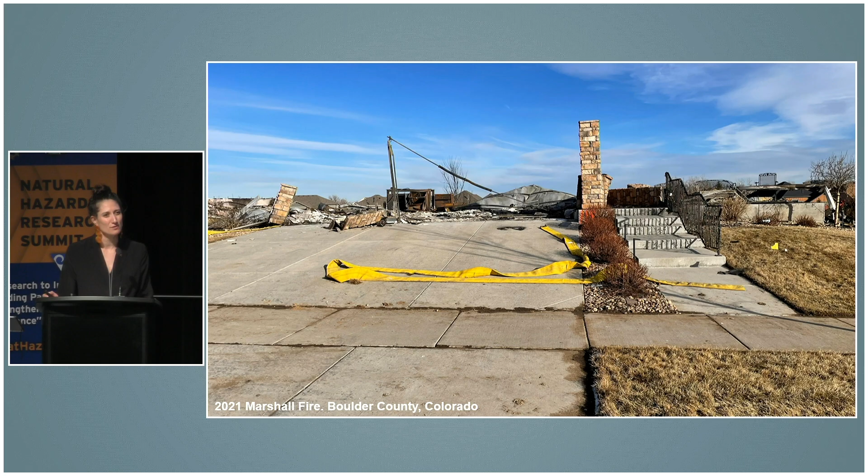The fire exclusion policies enacted throughout the 20th century, coupled with climate change, make it impossible for this hazard to only be mitigated within the wildland. We must be mitigating within our communities. Wildland response as well as urban response are becoming overloaded, leaving us with devastated communities. When fire is propagating through the wildland, our vegetation is the fuel. However, when fire is propagating through our communities, it is our single-family homes that are the fuel for the fire, which is why we have to think about the design and mitigation of these single-family homes.

And so what do we do for communities that look like this? Well, first off, we have to acknowledge that fire is a natural occurrence within our landscape. Our flora and our fauna actually benefit from fire within our landscape. And so we cannot continue the fire exclusion policies that were enacted during the 20th century. Also, as a NHERI community, we know that our critical infrastructure components need to be protected. And so what is the connection between the fire and these critical infrastructure components? And this is where our homes come in.

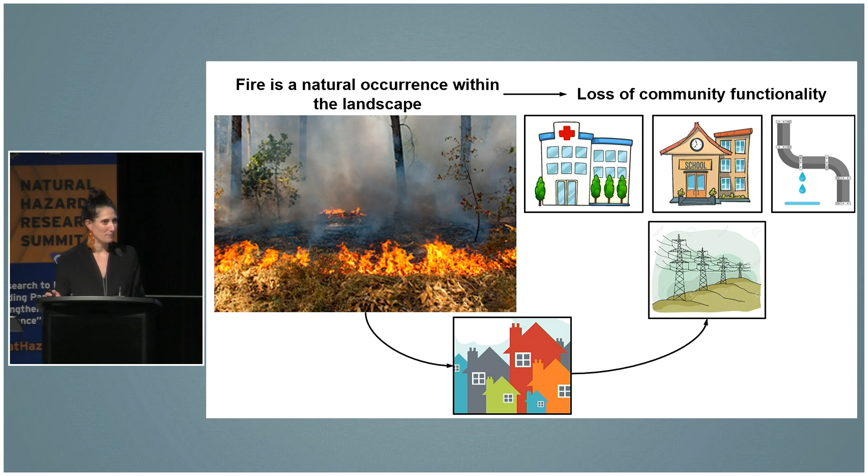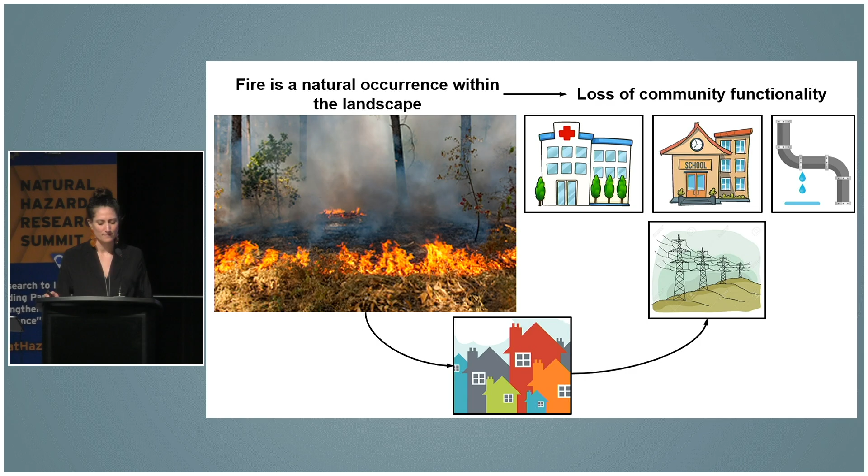So our homes are the assets within our communities that need to be protected, as David pointed out in a previous talk, but also it is the fuel within our communities that need to be protected against so that we are not overloading our fire response. And so if you think about what the mitigation practices are today, a lot of it is centered around defensible space. And what does that actually mean? Well, defensible space means that we are clearing our land of ignitable material around our house so that our house can be defended. Just as in other hazards, our mitigation practices are focused around life safety, not asset protection. So for our fire response to be able to defend our homes, we need to reduce the intensity of our fire within our community, and that is going to occur by reducing the amount of ignitable material around our homes.

In addition, the most common fire spread mechanism within communities are embers. Embers can fly up to 2.4 kilometers and even further in these wind-driven events that we're seeing, such as the one in Lahaina, such as in Paradise, California, such as in Oregon in 2020, Colorado in 2021, and in Santa Rosa in 2017. This means that every home within 2.4 kilometers of an individual home can threaten that home for igniting. We understand the concepts of community resilience in this room. We have done tons of research that community resilience cannot be achieved on a house-by-house basis, property-by-property basis. We need to look at community-wide, and this hazard is no different.

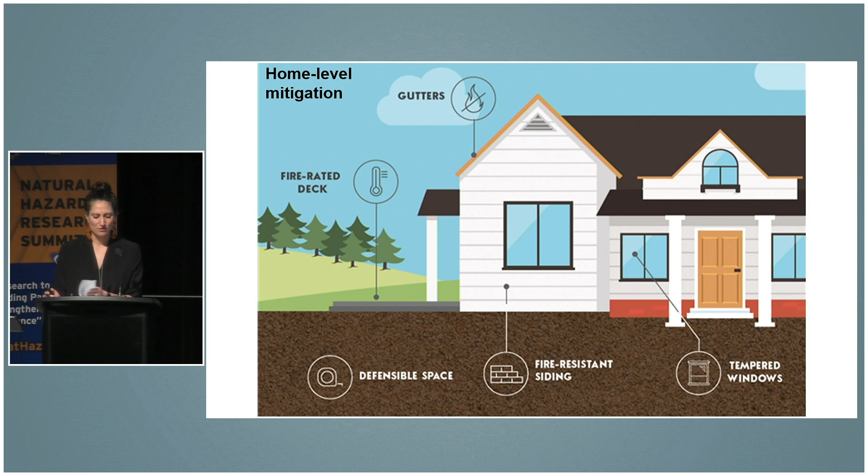And so we can mitigate on different levels. We can mitigate on the parcel level, and this is removing the ignitable material around the house, reducing the intensity of the fire as it encroaches the house. We can actually mitigate on the home itself. Home hardening will reduce the likelihood of ember intrusion within the house so that the home is not igniting from the inside out. But there are also community-level mitigation measures.

How close are our homes to open spaces that are burning? Or what are the pathways for fire intrusion into our communities from those open spaces? What is our home-to-home spacing? In some communities, our homes are spaced so closely together that they are in each other's defensible spaces. What do we do? How do we mitigate within those types of communities?

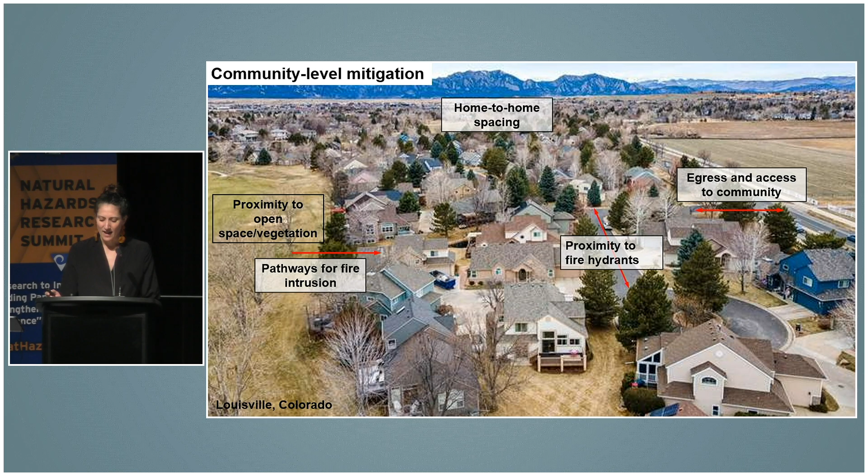What is the egress and access to our communities for firefighting? And what is the proximity to fire hydrants so that our homes can actually be defendable? So this community is really primed to start research on this topic, and I hope that you all will attend the session tomorrow where we're going to talk about how to enter into this field of wildfire research, how there are many researchers within this room performing research in this space, and they didn't all start here.

How can we use our knowledge from other hazards and apply it to this hazard? How can we talk about building transdisciplinary teams, as many researchers have talked about today, to really solve this problem? And what do we need experimentally, numerically, and from field data collection to be able to systematically collect data on our homes and what is causing home destruction in these communities?

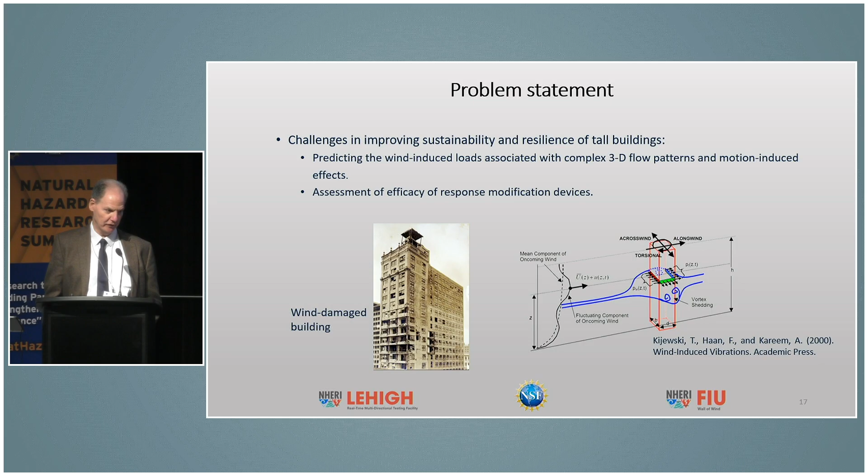And as we know, we've been talking about resiliency, and it's rather challenging. I'm just focused on tall buildings when we look at the complexities of the wind motion and the way that the structure deforms, and more so if you have to evaluate response modification devices to make the system more resilient. That could be very challenging if we don't have the right motion in the system or the right loading.

And so this makes it rather difficult and challenging now, and not to badger traditional wind tunnel testing, because things have evolved, but what's often used there is rigid aerodynamic models, and so they're easy to construct, but they ignore elasticity, aeroelasticity, and in some cases, is that important or not? That's something we actually try to understand better. More so, if you don't have the right motion in the structure, how are you going to evaluate how well a response modification device does if you don't have the right motion to begin with? And so that's a challenge.

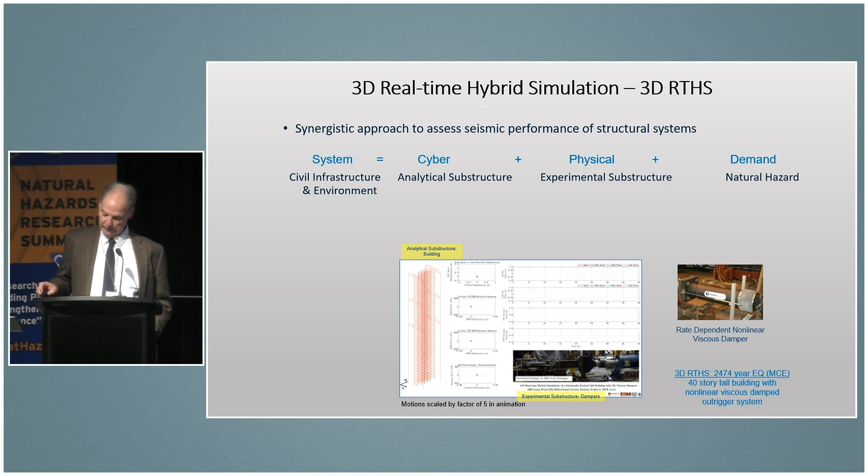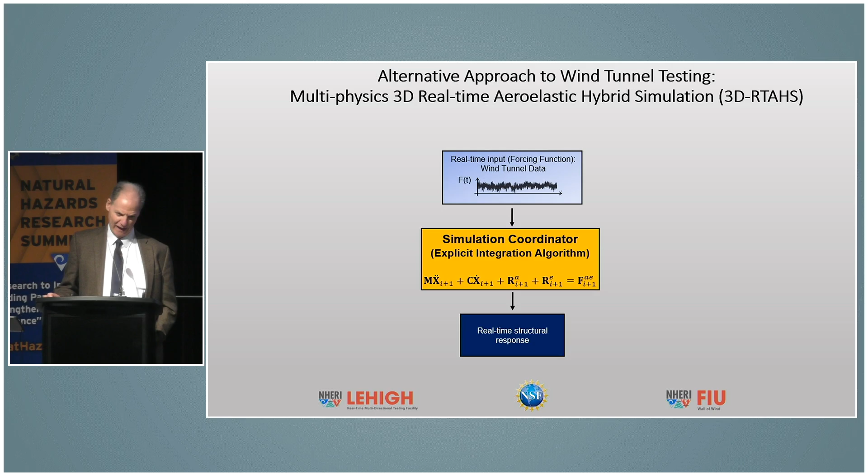So if you take a step back and look at what we've done in earthquake engineering, we've tried to use a synergistic approach in which we define the whole system, and where you define the system, it's up to you. It could be the whole city block, but you define the whole system. In this case, I define it as a civil infrastructure and the environment. And we're going to discretize this into two domains. I'm going to call it cyber. Sometimes it's called hybrid, but cyber, and then there's the physical.

And then demand is imposed on both, and both of these are synchronized together. And the cyber is the analytical substructure. That's something you can model really well. And if you can model everything well, you don't need anything else, but you usually can't, particularly on response modification devices.

And so that's the physical domain, for which there's no really good numerical models. You have to model that physically, but you got to link all this together. And so we developed this technique, real-time aeroelastic hybrid simulation, in which we have an experimental substructure. I show some dampers here in this tall building. There's the tuned mass damper in one direction and the outriggers in the other.

And we have this aeroelastic, sorry, things got ahead here. I don't know what happened. I just lost all my time.

So anyways, we have an experimental substructure that's defined, and it's coordinated and synchronized with a new substructure, which is an aeroelastic substructure. And this aeroelastic substructure is there to measure the wind pressures when the system's put into the deformed mode. So it will give you the right wind pressures, and your response modification devices could be in a separate substructure, so you don't have to interfere with the instrumentation or the motion of that structure.

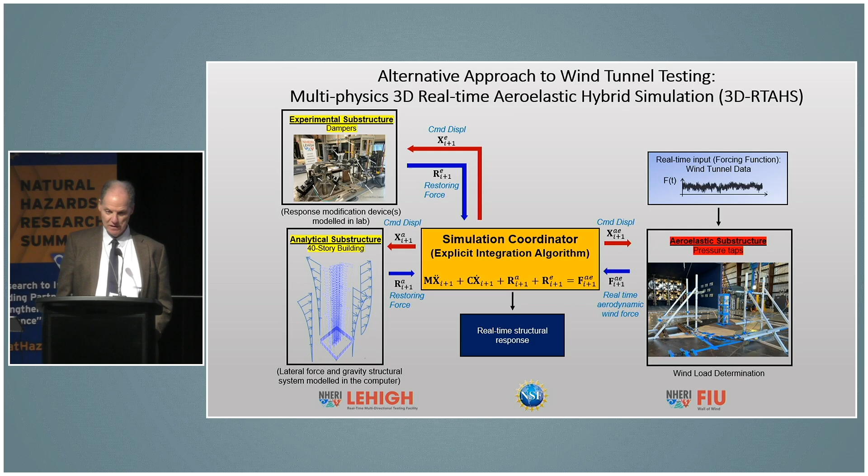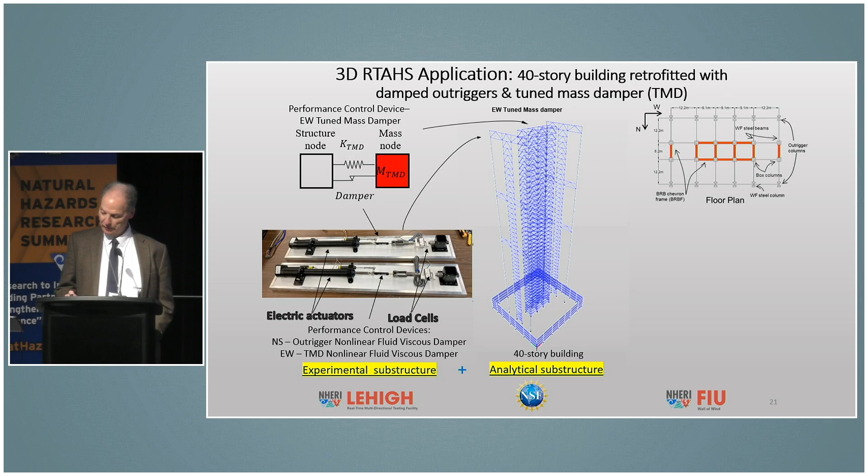And so we applied this to this tall building, in which there's the experimental substructure, the dampers, and this outrigger system. I already explained the tuned mass damper. The analytical substructure is the remaining part of the system, except for the aeroelastic component. That's actually in the wind tunnel at FIU.

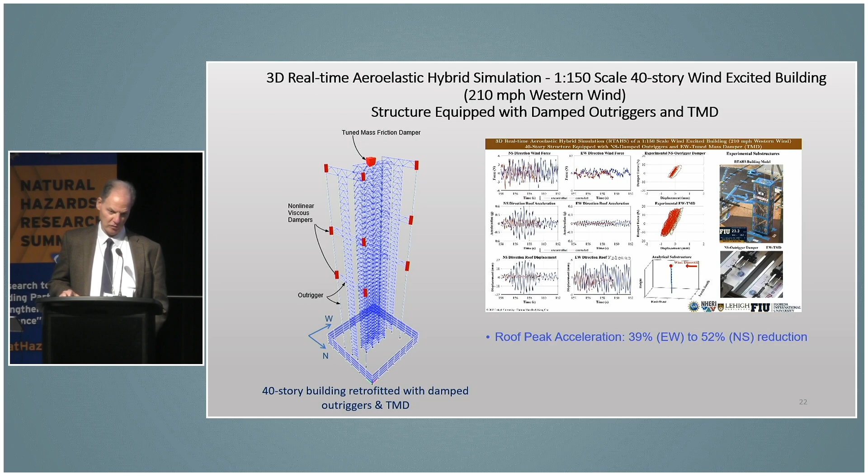And so we applied this, and what did we find? Well, I'm only presenting you some of the results. We found a significant reduction in the roof accelerations. I mean, appreciable. And this was achieved by applying these response modification devices, which we had to model physically, because the numerical models really were not very accurate.

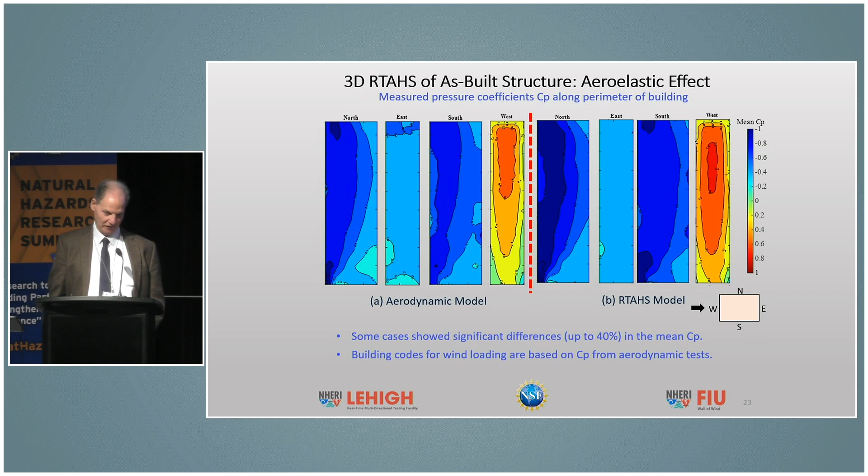Now, the other thing that's important is coming back to the aeroelasticity effect. We went back and looked at the rigid aerodynamic test, and then we looked at the aeroelastic effect that we had. And what did we find? Well, you look at the pressure coefficients, and where are the pressure coefficients used? In the codes for designing your structure. We found up to 40% difference, right? They could be plus or minus, so that could have a significant effect, I think, on the design.

And so with that, I just want to express thanks for the collaboration with FIU. I think we offer now to the stakeholders and other researchers that technique to try to better understand in wind tunnel testing how things really would perform out in the real world. But more importantly, we've developed a synergistic approach to training the next generation in cyber physical simulation.

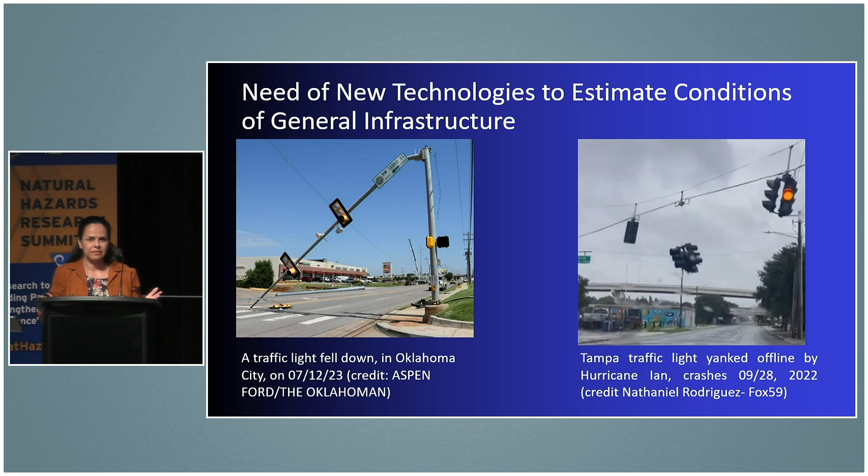My research is on protective systems and AI-driven methods to extract structural conditions. And today, I'm going to give a high-level presentation on how we can use computer vision to make assessments on structures that no one is paying attention to now. You see pedestrian bridges falling apart, traffic lights, light poles falling under storms, and we don't have a way to measure or to get data to prevent this from happening. If you had data before this happened, maybe you could take action.

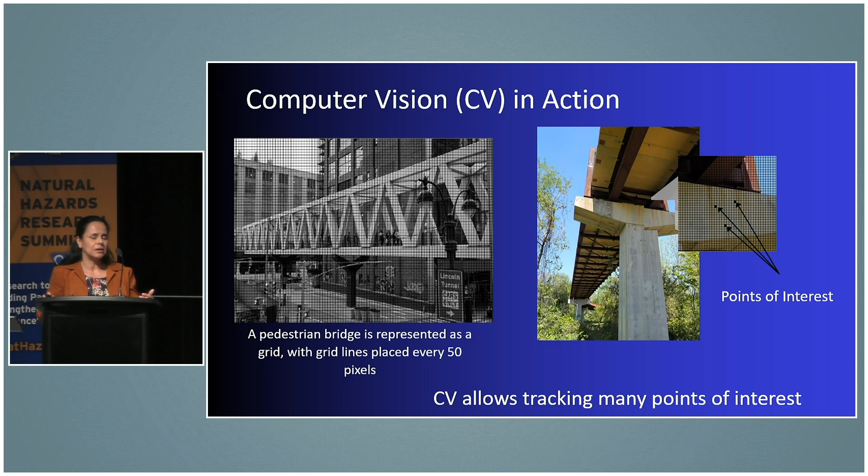What computer vision does, and the intention here, is to extract information, exactly displacement from a point of interest, without contact. Usually we have sensors. In this case, you don't have contact. Then you are able to get as much information as possible from that.

The big picture is that you are using AI, in this part, computer vision, to get displacements and process those displacements. And with just the simple processing, you are able to extract essential information for you to say if something happens. If you'd like more information, you can go further with machine learning models.

Then here we had an example with a full-scale building that was fully instrumented. And by tracking 2 pixels, the red points on the video, you are able to reproduce the sensors data accurately. Then this shows that we are able to use this tool, and it's accurate.

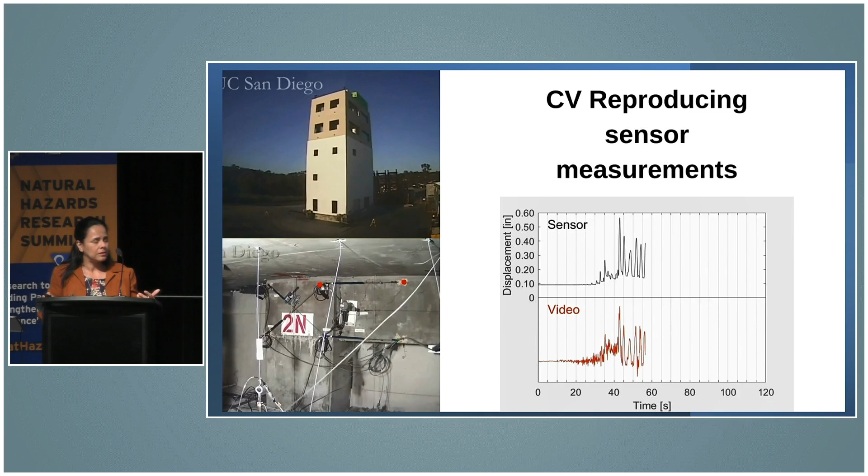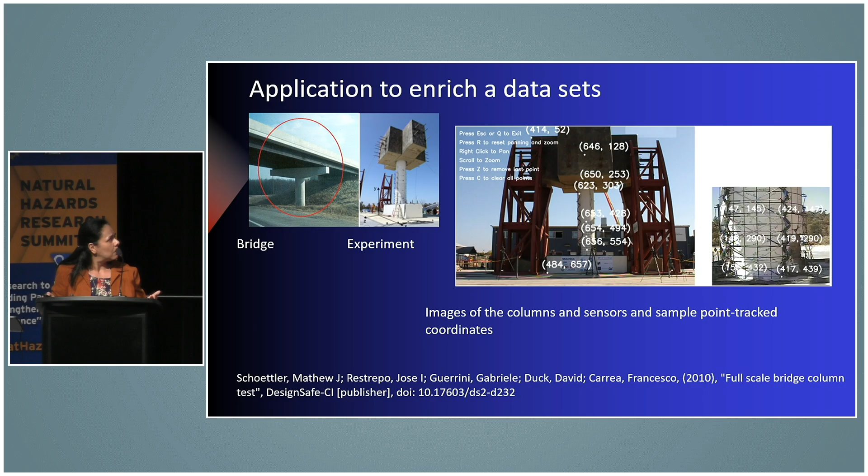We also here have an example about a simulation, the bridge column under earthquake testing. And we are able to see it was fully instrumented. It's very difficult, it takes a lot of time to get this done. And by tracking the pixels, we are able to measure the global responses.

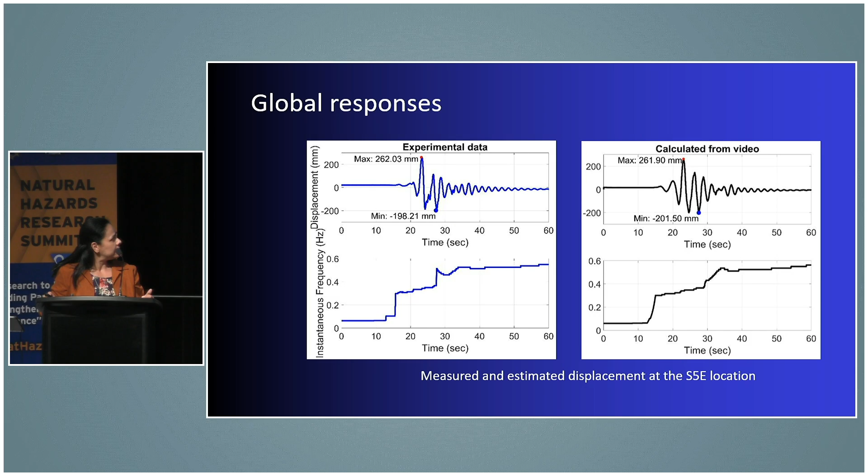The blue lines are the sensor data, and the black lines are measured by the video analysis. And you see good global responses and local responses with just little measurements. And we were also able to detect errors on the sensors. Then this is allowing us to create enhanced data sets, but also to verify the sensors data.

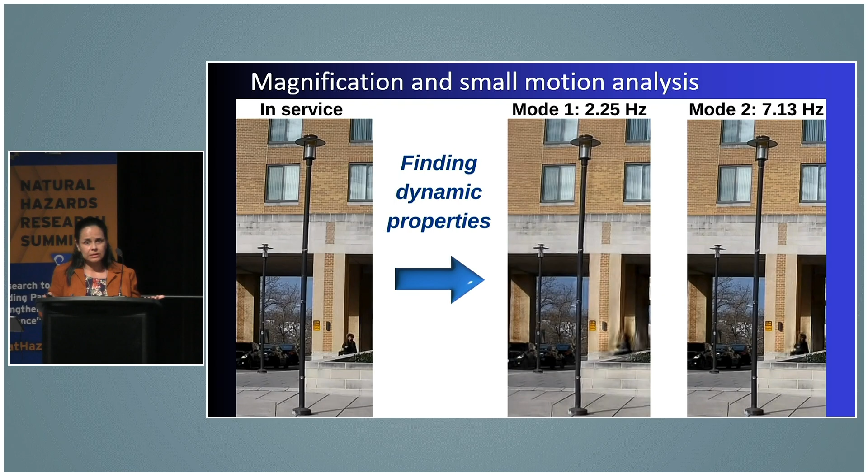Then moving on with magnification and small motion analysis, you will see in the left side video, you are not able to see a movement with the naked eye. If I do magnification, you will see you extract the modes, the vibration modes of the light pole that no one pays attention to. Then imagine that you are able to extract dynamic properties just by looking at video, and over time, you can see the difference of those properties, and you can say if there is a compromise on the structure.

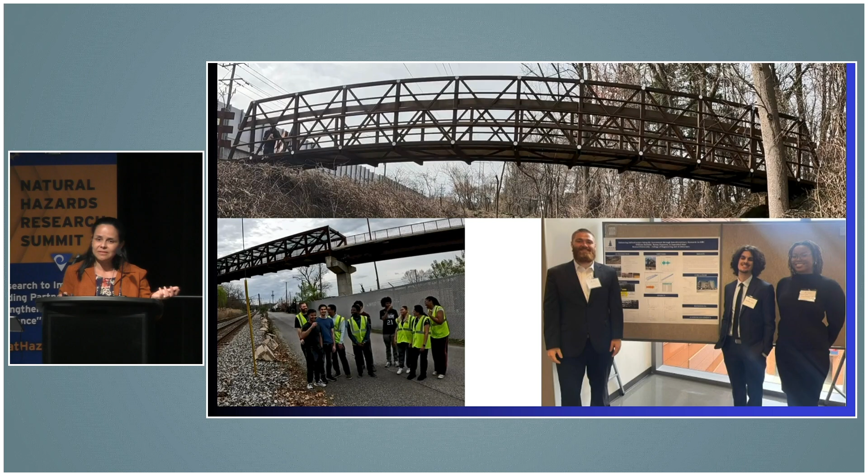But this is just the fun we had with the students. And it's very easy for me to engage with them, to go get real data on the field. And now they are presenting. They value contributions from different disciplines. I'm working with computer science students and civil engineering students, and they value how they contribute to the problem. Then this is something fun for me. This is like my hobby.

And in conclusion, this is a powerful tool for us to think about and continue evolving. And it's not only helping us to get good data, but also engaging students in this field.

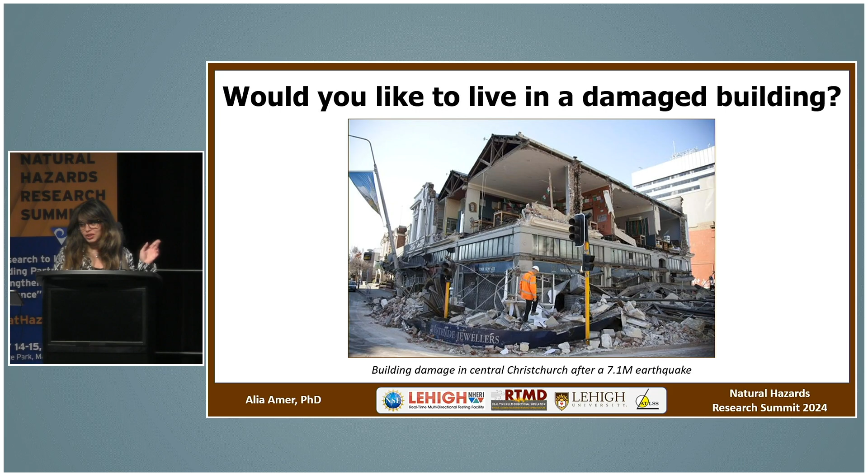I'm going to talk more about my journey at this facility as a PhD student and also as a postdoc. So I'm going to start with a very simple question that can summarize all of my research: do you want to live in a damaged building after an earthquake? Unfortunately, we cannot turn this into a discussion because it's only 5 minutes, but I hope you all agree that we don't want that. So that's why we see seismic resilience becoming more trending over the years, because we want to develop adaptive systems that can recover quickly after a disaster.

So in order to answer the first question, we need to learn more about the damage states of the CLT rocking walls. We need to know how they interact with the building as a whole, like the floor diaphragm, gravity load system, and we always forget about connections, but connections need to have the capability to accommodate the kinematics of a building without damage.

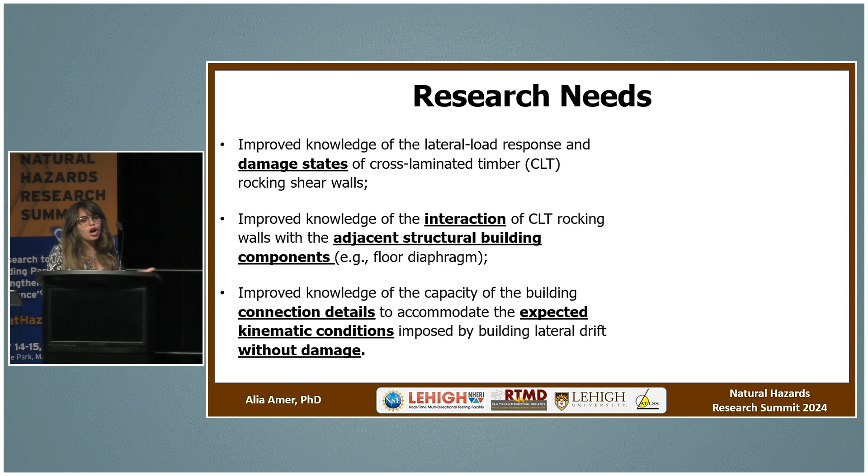But when we're talking about kinematics, we cannot really say that we can start testing structures under unidirectional loading, because earthquakes come in any direction, and multidirectional loading can be more damaging to structures, and spoiler alert, it is more damaging. So we have to start looking at testing under multidirectional loading.

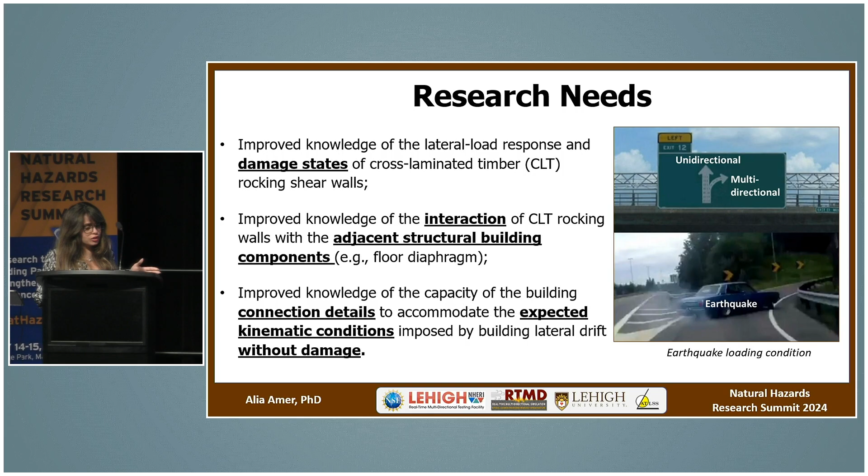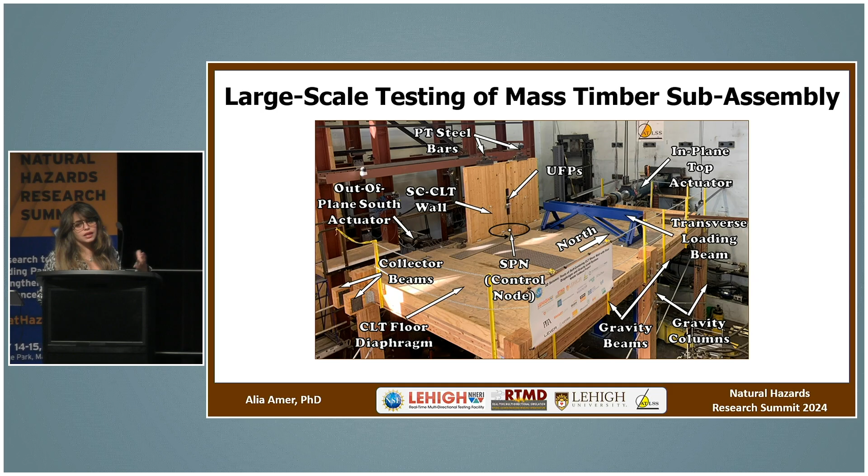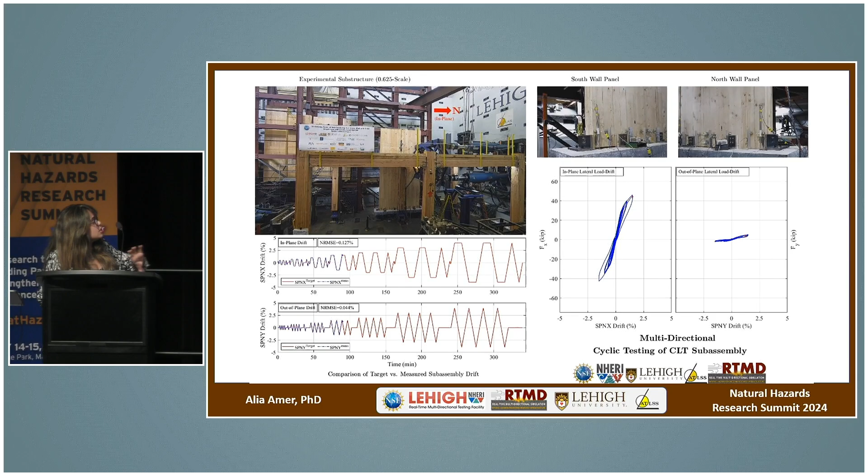So at Lehigh, we built part of a prototype timber structure. We wanted to design and test a resilient timber structure that has all the components and connection details that we can find in a typical structure. And this is a very quick video of the test sub-assembly under multidirectional loading. I hope you can see that all the connections can deform or accommodate the multidirectional loading. And at the top right of the video, you can start seeing localized damage at the CLT rocking wall.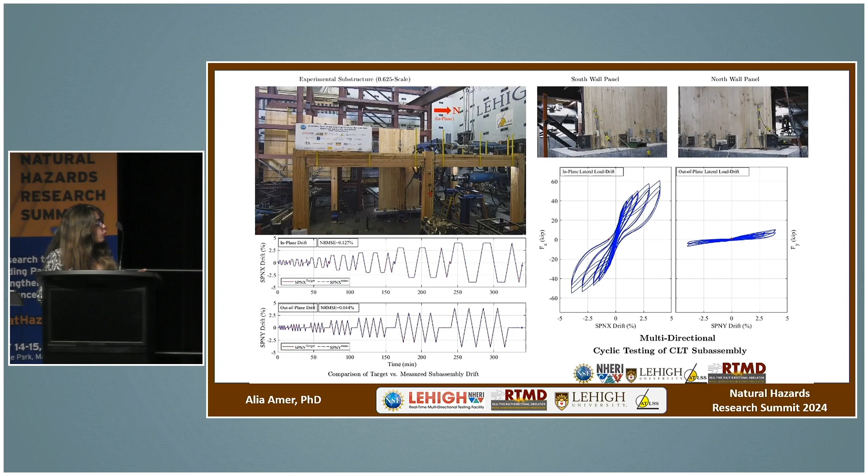So we observe damage in the walls. We quantify this damage with engineering demand parameters, and we can establish fragility functions for engineers to use to achieve resilience in timber structures. And you can see now that the probability of damage in a CLT wall panel under multidirectional load can be doubled compared to only considering unidirectional load.

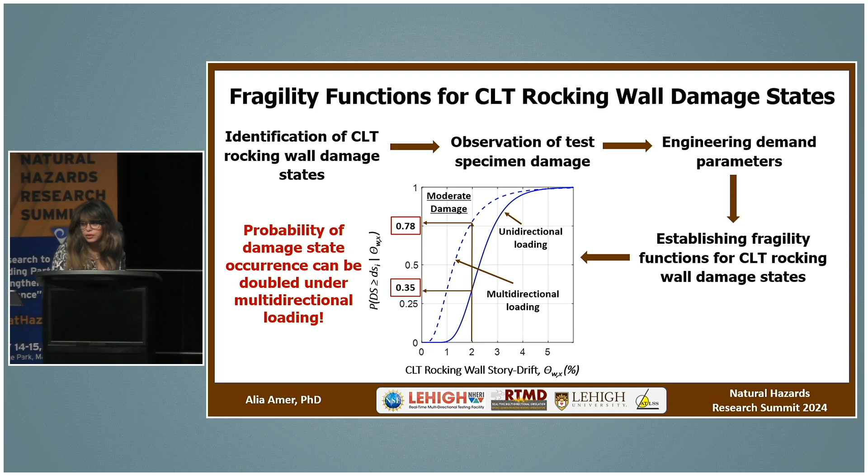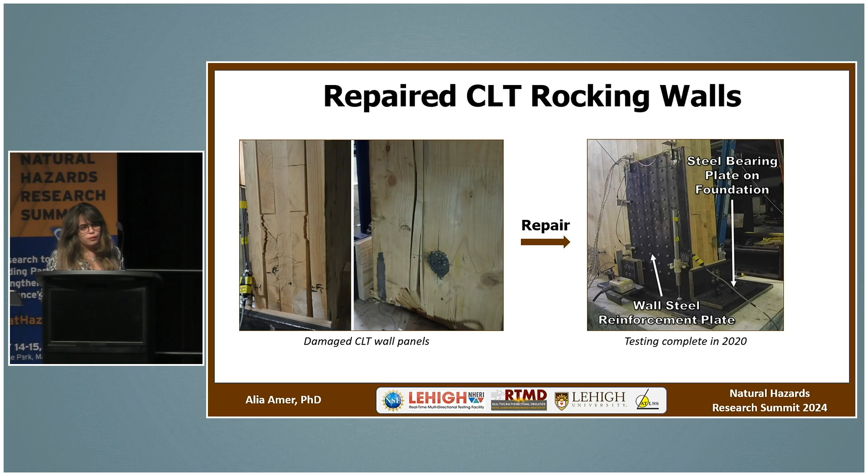So I told you now we have a problem, that we have damage. So at Lehigh, we didn't just leave you like this without a solution. We designed and tested a proposed repair action for damaged CLT rocking walls in order to restore the initial state of the wall.

Like 2 weeks ago, Professor Ricles and we were whitewashing a specimen together, so it helps a lot for you as a young engineer, and as a female specifically, that has no experience. There's a lot of things happening behind the curtains when you do large-scale testing. I had to learn a lot about sensors, I had to design control algorithms, checking stability of actuators. All of these things cannot really be mentioned in a dissertation, but it definitely helped me a lot in becoming a successful researcher.

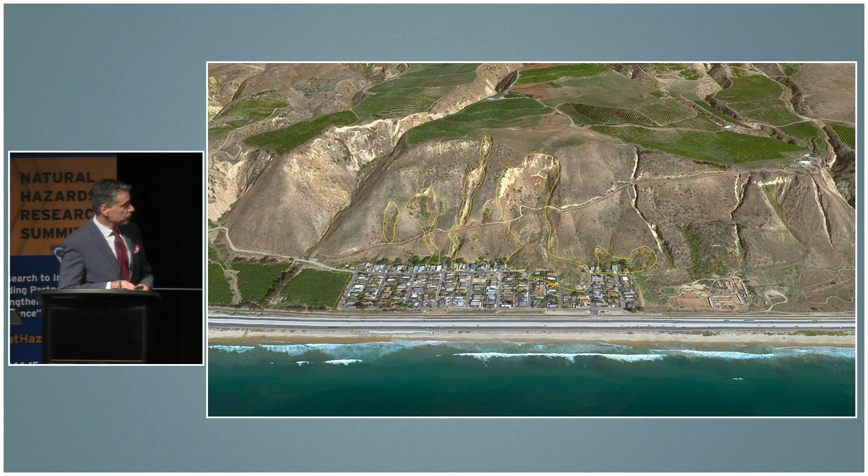And we typically look at this problem through a risk perspective, and this is the equation many of you are going to be familiar with. Risk is the likelihood of a hazard, and then, given that that hazard occurs, what are the consequences of that event? And of course, that's a distilled version of a much longer probability equation that relies on the relationship between the magnitude of the hazard event and what the outcome is.

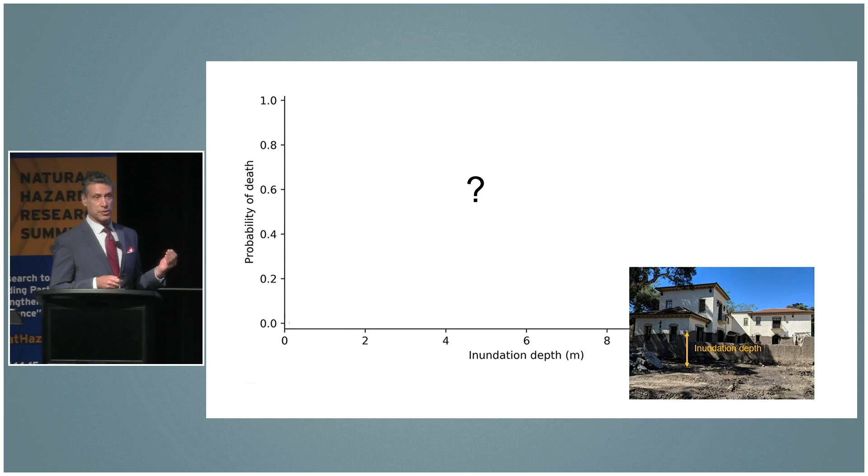And so we've traditionally used some general rules of thumb, some approximations, in order to find the relationship between landslide inundation depth, which is the depth of the landslide when it strikes a structure, and the likelihood of survival. And so my graduate student, William Pollock, and I did some work trying to develop an empirical database to really refine that relationship.

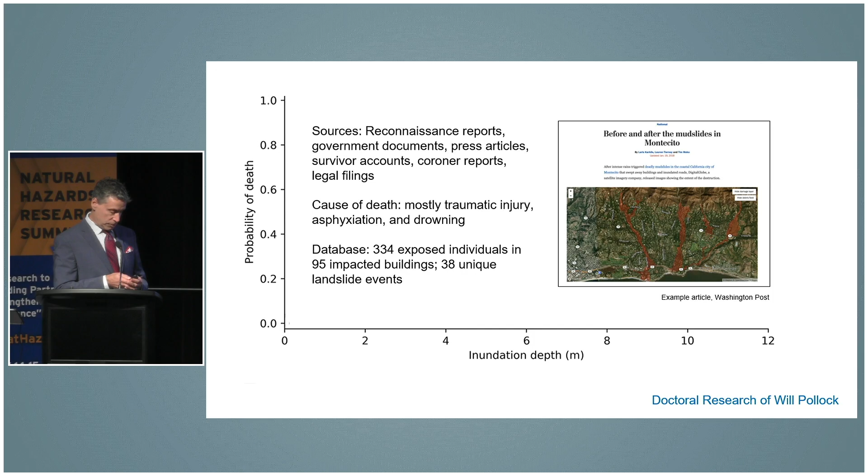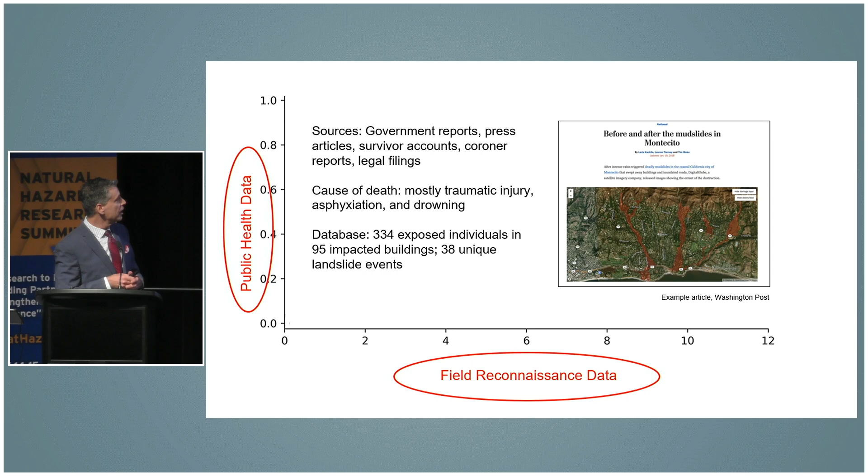And so we relied on a number of open source records from the public health data, from government reports, from reconnaissance reports. We ultimately came up with 334 case histories that populate this database. But I want to say that really at its heart, this is field reconnaissance data on the horizontal axis, such as that we collect at the RAPID facility and help others collect. And on the vertical axis is public health data.

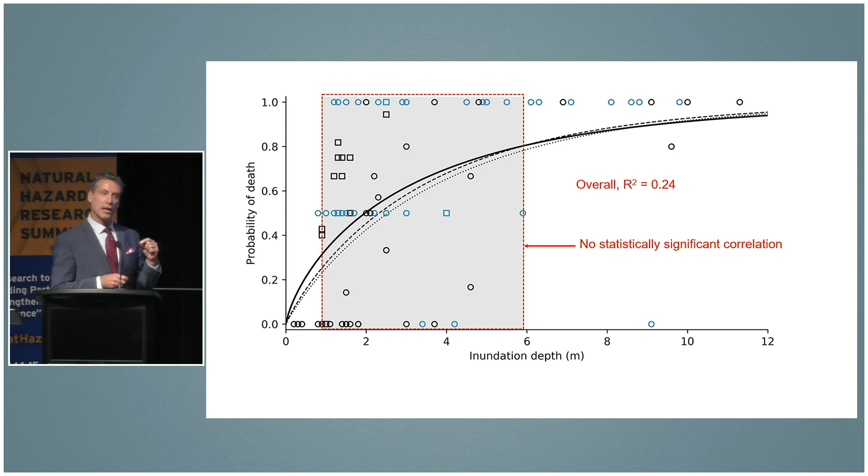And most importantly, there's no statistically significant correlation between inundation depth and loss of life for that portion where we have most of the data, and for most of the kind of real world examples. And so that means that something else explains survivability. It's not the size of the event as we have traditionally thought.

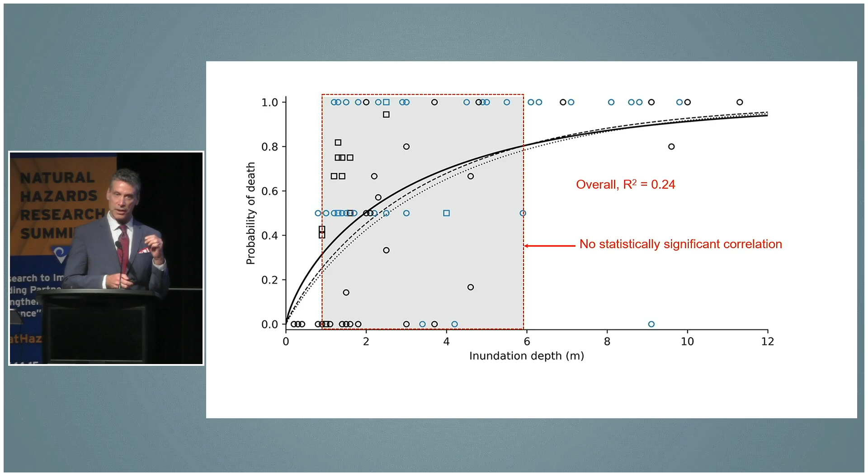So we went back and looked at eyewitness accounts. We went back to a lot of press accounts, a lot of survivor accounts about what actions were taken, about accounts of those who were lost, and about accounts of those who survived. And we did a statistical analysis to look at what kind of factors were correlated with loss of life. And what we found is that human behavior really explains and really drives survivability in these large landslide events. And it's for several reasons.

First off, we know that simply being aware that you're in a landslide hazard area promotes action when there are precursory signals, which are usually audible. And secondly, we know that individuals who move upstairs or who are permanently situated upstairs, particularly in the evenings when they're sleeping, have a much higher likelihood of survival. In fact, it's an order of magnitude increase in odds of survival.

And so that means that some small modifications, such as moving upstairs during periods of extended risk, can increase your likelihood of survival. So those kind of small human actions can really reduce the overall risk. You can also learn a lot if you look at the lower right side of that diagram, and this is the case of individuals who survived under very adverse circumstances.

We took a lot of those accounts and we distilled those into some lessons learned and some protective actions that can be taken. They've been reported in the press. They've been simplified into community guidance documents that have been distributed to communities who are at risk of landslides, and we have full details in a paper that accompanies this study.

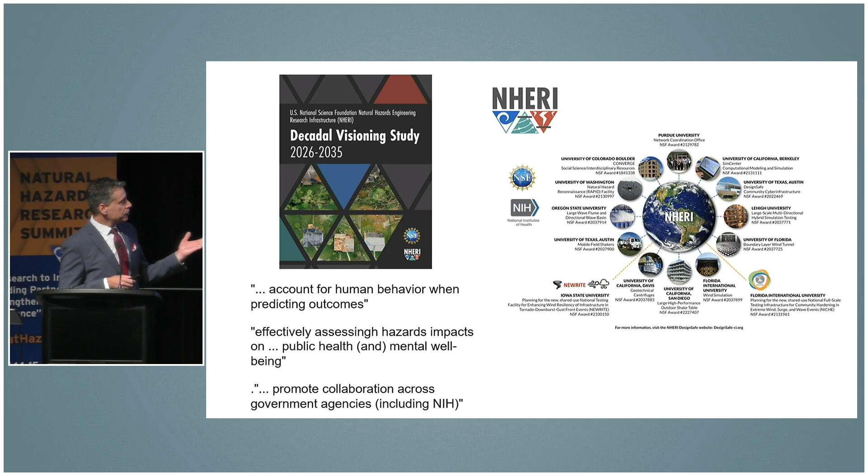And so I think that we have a vision. I think what's coming very soon are the tools in order to do this. And I think that we as a NHERI community now have the opportunity to really make significant progress in understanding the human dimensions of disasters and also to reduce the impact on our human health and on community and enhance community resilience. So thank you.